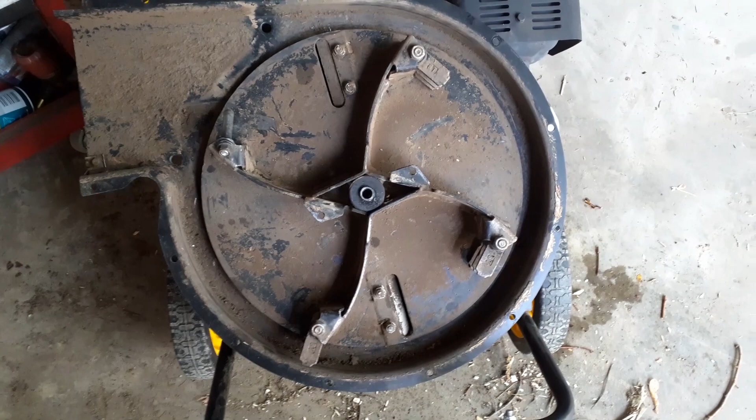How do you get this impeller, this big wheel, off a Champion chipper shredder? There was a little bit of a wreck.

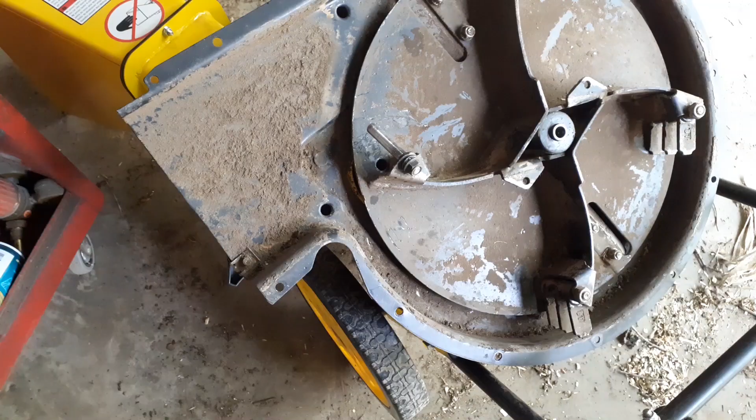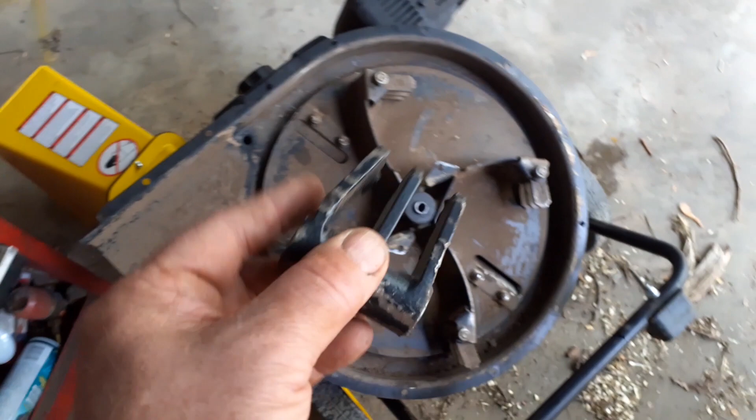There were some hand clippers or something metal in a pile of compost that was being shredded, and it went through. It ended up bending this ear and totally destroyed this part. It wasn't found, so this is a replacement. I put it in, and it also bent up this grill.

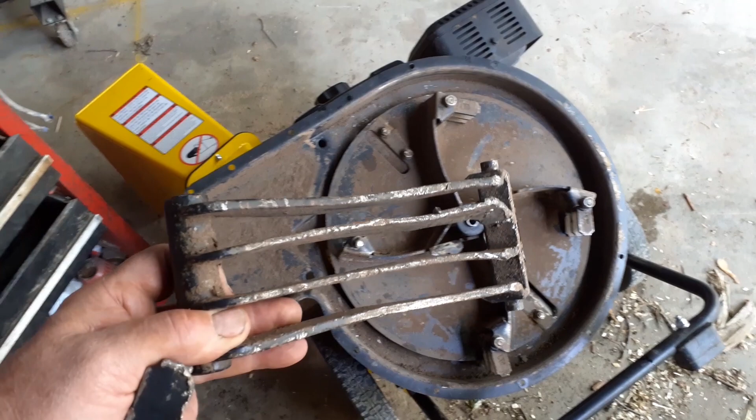It was worse than this, and I straightened it out the best I could. I bought a replacement flail to replace that, and I got a brand new pin. That's the new pin, and I attempted to straighten that, but it wasn't quite aligned. It wasn't good, and it immediately blew up.

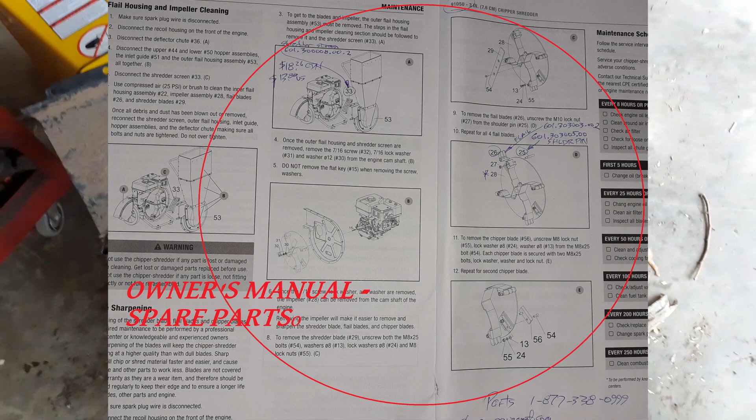So what I've done is I went to see if I could just order the wheel, and I would swap over the blades. They sell this entire thing as a unit, and it has the blades on it already, I'll show you that after. So I ordered the entire unit, and it just arrived today. Now I'm taking this off.

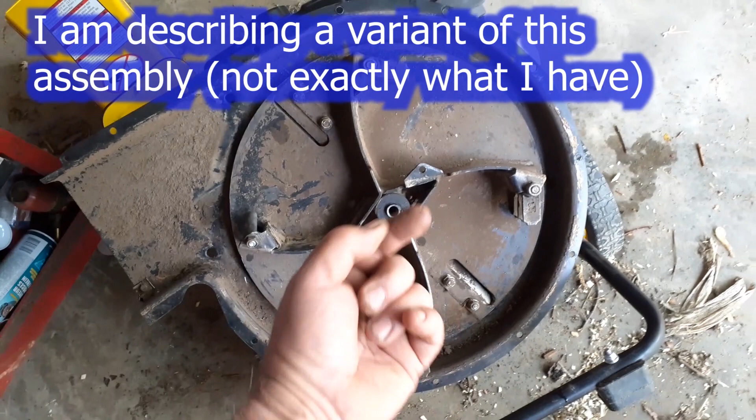If you look at videos on the internet about these chippers, they're all the exact same, probably made by the same place in China or wherever. This hole is threaded with a larger thread than the shaft on the inside that comes with it. It's an extended camshaft with a thread on it, and this has a bigger thread on it.

What you can do is get a special cut down bolt with an extended tip on it. Basically, you thread it into this larger hole, and the extended tip goes through into a hollow or end on the camshaft, and it will pop off. So you can use this puller bolt.

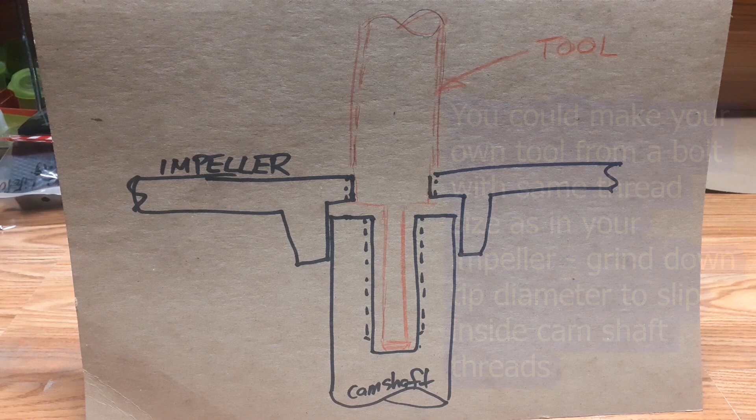This cartoon is to explain how the removal tool would work. The removal tool is in red - this is what you would use if your impeller, that's what this thing is, was tapped here. What this represents is the impeller. The impeller there is a slip fit here to the camshaft, and there's a big key also. This is not to scale - that's actually a longer engagement, but it just shows you, it's a cartoon.

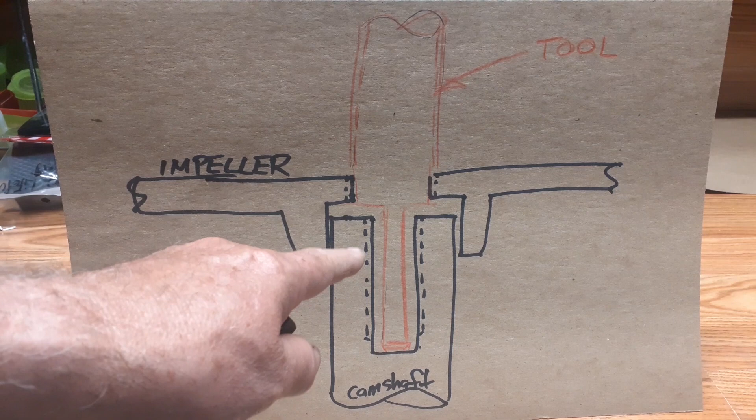The camshaft is tapped, and a bolt threads into that. The bolt sits then with washers on top of the impeller, the big wheel, and holds it down.

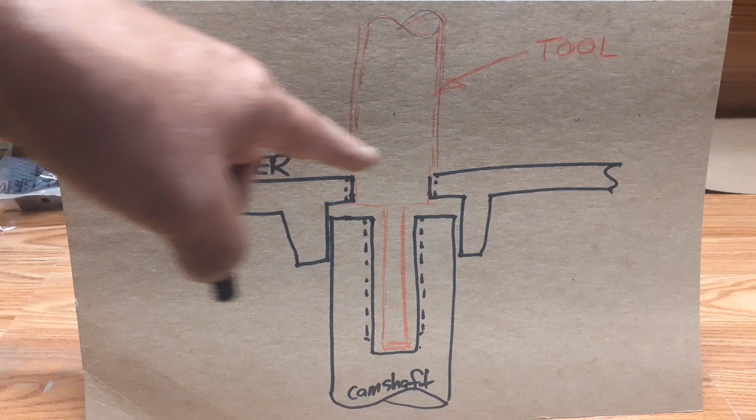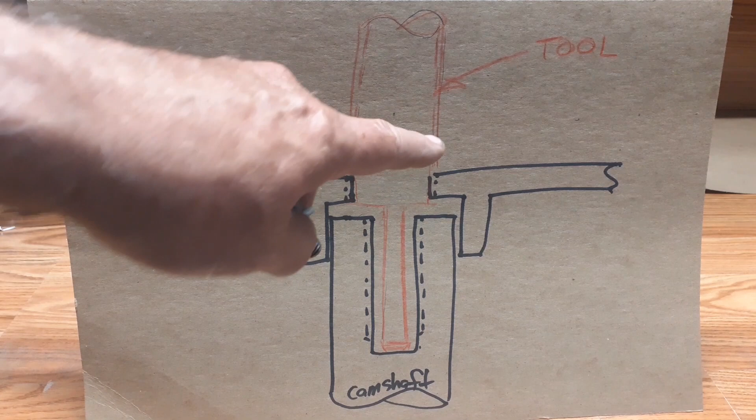On my impeller, I don't have any threads here - it's just straight through, so I have nothing to grip on. But on some impellers, this is threaded. This diameter here is much larger than that diameter, so the bolt can go through and doesn't even contact that.

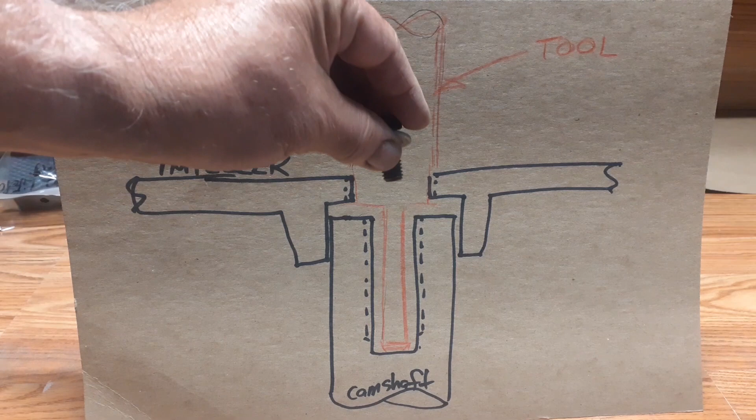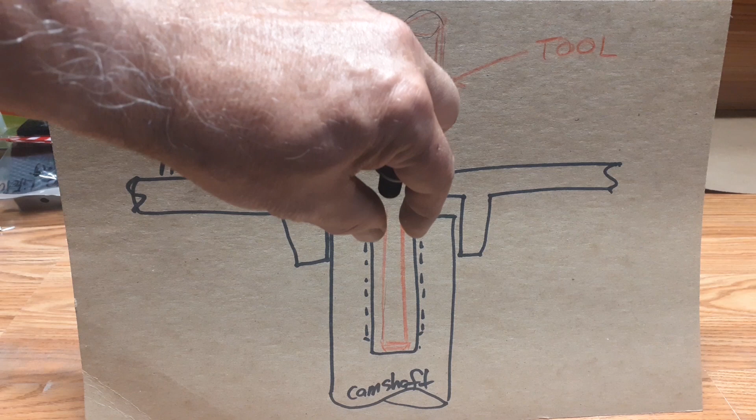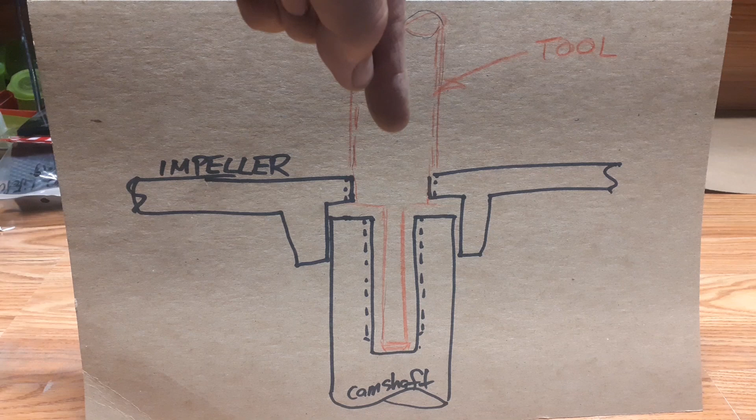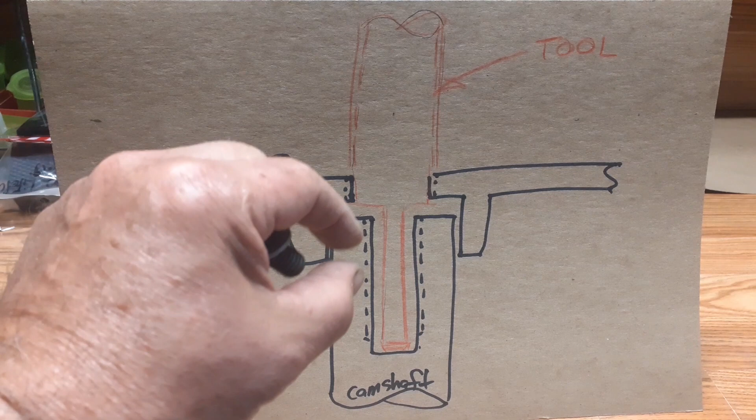But on your tool, what is in red, it has large threads up here, then it necks down and has just a thin thing like a punch, smaller than the thread, so it doesn't contact the threads, it just contacts the bottom of the hole. When you turn this bolt - it's got a bolt head on it, basically a modified bolt - it threads through here and runs itself down. As it runs down, it pushes on the camshaft, the bottom hole of the camshaft, and separates those two. As it works in that thread, pop, there it goes. So that's how that works.

This is not how it works for my machine, and I had to come up with another method. So this is a brief explanation of that.

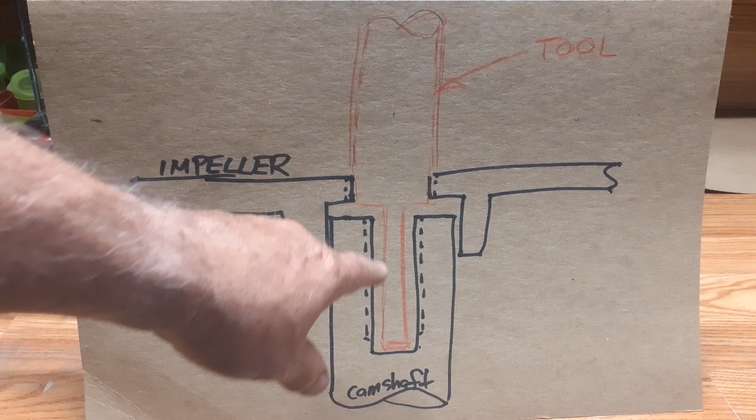If you were to make this up, you would buy a bolt, whatever the thread size is there, about 5 inches long, something like that, and do some measurements. Measure with a piece of wire the depth of the bore and so on, and grind down the bolt so it was a small diameter here that would fit into this M12 hole. This is M12 threads here, at least on mine.

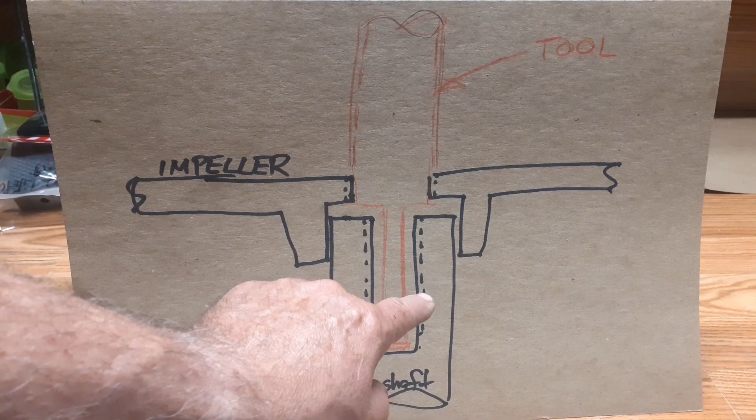Unfortunately, this one and this wheel, impeller wheel, and the one that I received, there's a smooth bore through here. There is nothing you can use, no feature on this you can use in there to push it off the camshaft. So I've tried some things.

I tried an engine hoist, suspending this impeller from chains, and then tap, tap, tap, tap. I put a bolt in there and tapped, tapped, tapped, bang, bang, bang, trying to knock the camshaft back. It does not move. There's a fairly tight fitting shaft and a keyway there.

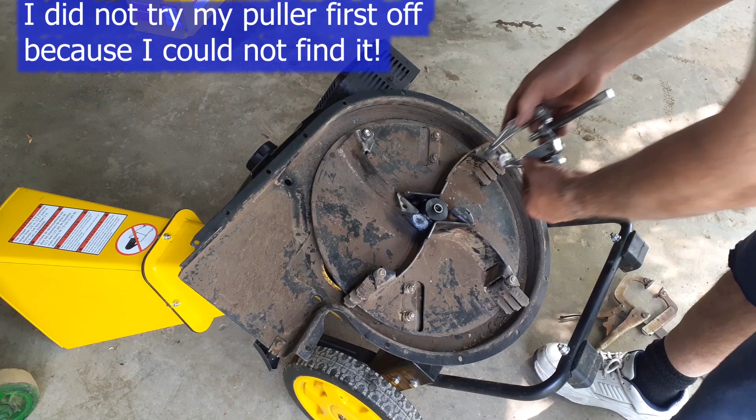So I thought I will use a puller. It's a 2-jaw puller. I thought, will these jaws grip at the angle and will they hold position here? What I will do is put in the bolt and thread it. I want to get maximum thread engagement, so I'm putting it all the way down, and I'm just leaving it 1/8 of an inch from seating.

Now I've already had this off, so it's not going to pop or anything like that. It's a straight shaft with the key, not tapered, so you probably won't get a pop. But you put it on like this. I drilled a little spot in the center of the bolt so that this will have something to center on - it's actually kind of ground away. And I put a dab of oil on it.

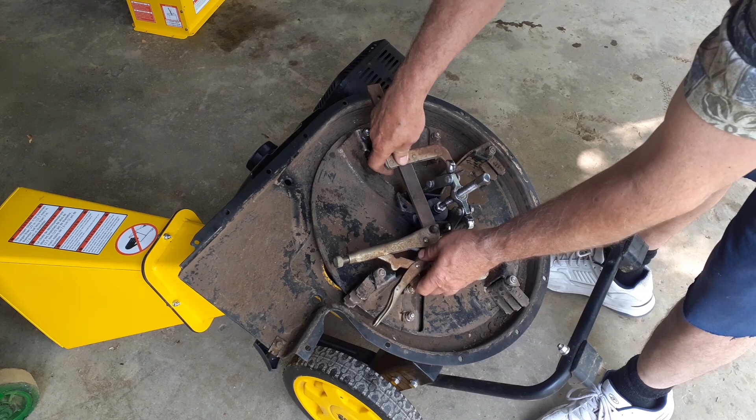And go like so. Now the thing I was afraid of, because of this angle to the jaws, was it going to pop out. So I put an additional clamp. It may not have been necessary, but I put this welding clamp on like that just to contain it. I don't want the jaws to pop out of the holes.

And it's a little bit crooked there, so we use a tiny hammer and periodically make sure that's in alignment. Okay, so far so good.

Okay, and I use the wrench like this, and now this is coming nice and easy, and I've used up that 1/8 inch of slack that I had, so now I'm backing it off. This is especially nice that I have this clamped in place, it's not flopping off when I undo this. But the bolt, I'm backing out the bolt. I'll back it out 1/4 inch, since it's coming easily now.

And now I'm going to tighten back against the screw that is screwed into the camshaft. But there's a gap between the head and the end of the shaft, or the face of the impeller. There, I just bottomed it out on the impeller, it drew the impeller up. So this is coming up.

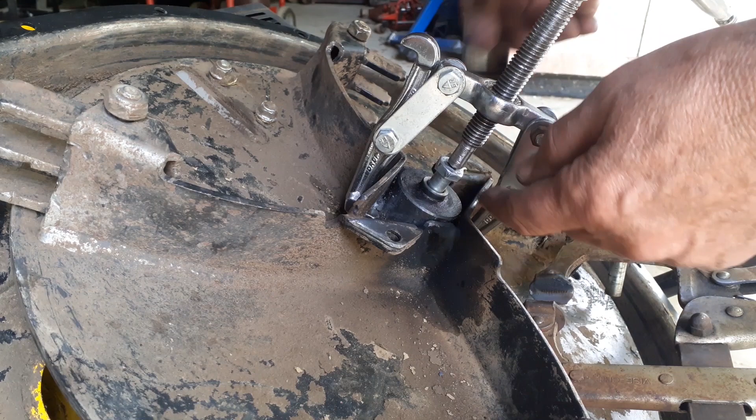Back off the pusher nut, and now I'm reaching down into the nut down here. I backed out the screw, so just a few threads are engaged. There's a 1/4 inch to take up there. Just watch that gap there, the impeller's coming up.

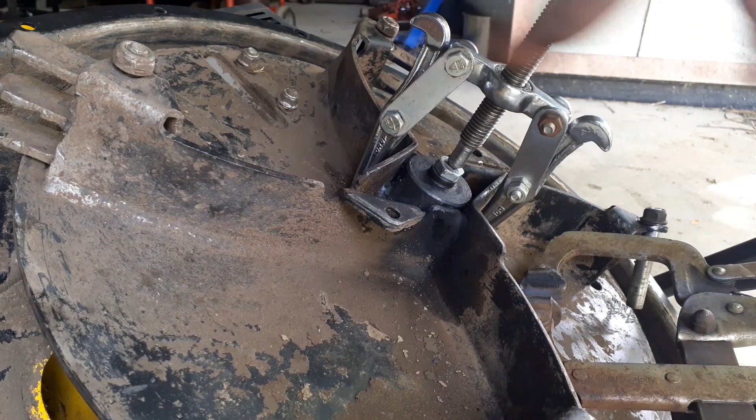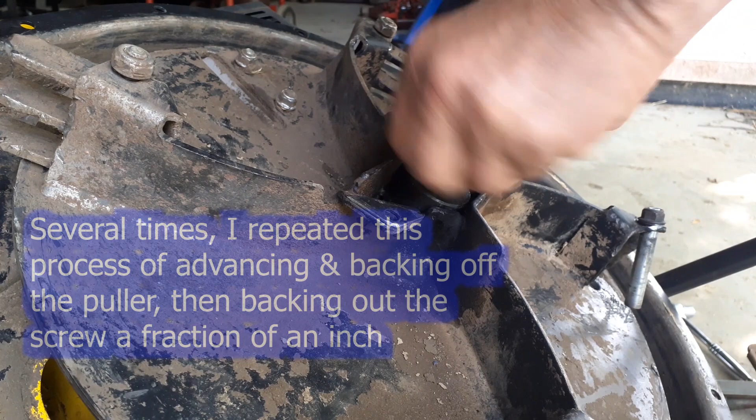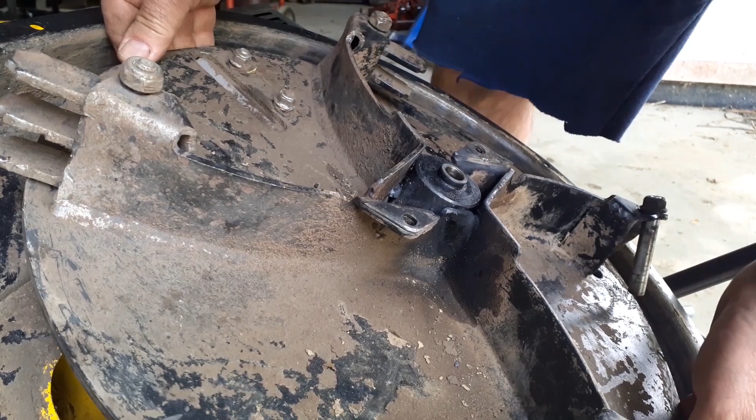Okay, at this point I should be able to pull this thing off, it just was a little sticky before. Okay. Well, you can see, keep wiggling. Don't let go.

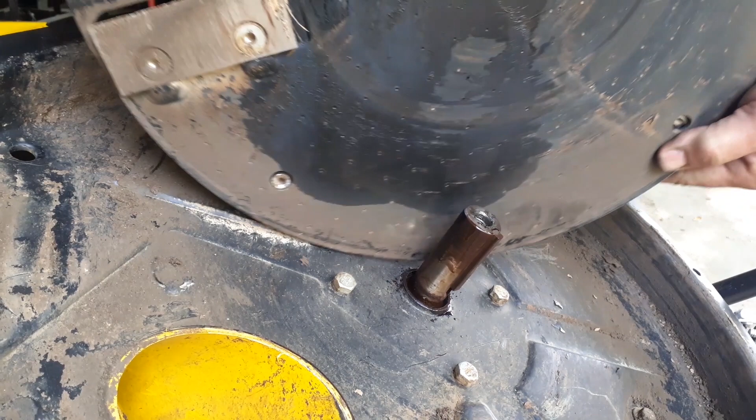There you go. So, see, it's a keyed bore. I did put penetrating oil in this last night. There's the key, don't lose that. It seems to be set in there, and that's the shaft.

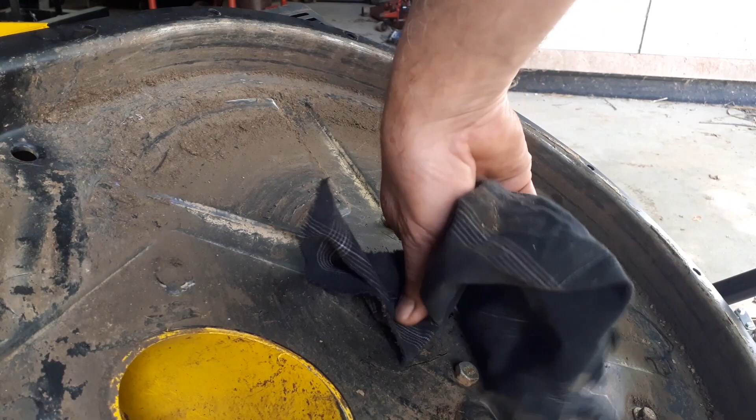Okay, I'll clean off the shaft. There's a lot of dirt around here, so I don't want to draw dirt onto that. I'm checking the key, nothing's twisted. I'm thinking one thing I worried about was from the impact, did I shear the key or twist it at all? But it pulled off nicely, and I'm pretty certain that didn't happen.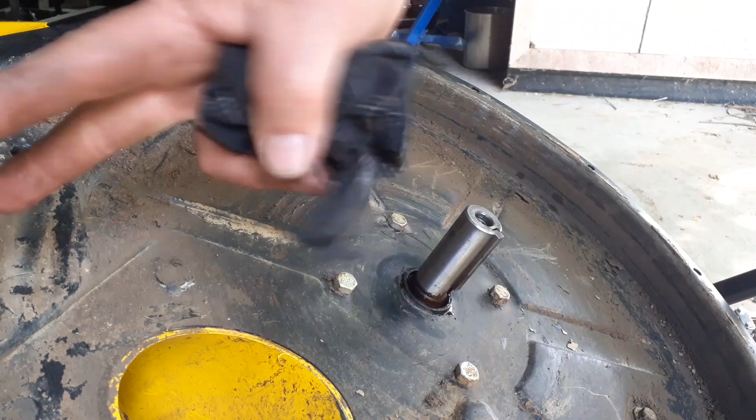When it did jam up, it was the flails hitting that screen here. This is where it jammed, and bits and pieces wedged between the impeller and the spout.

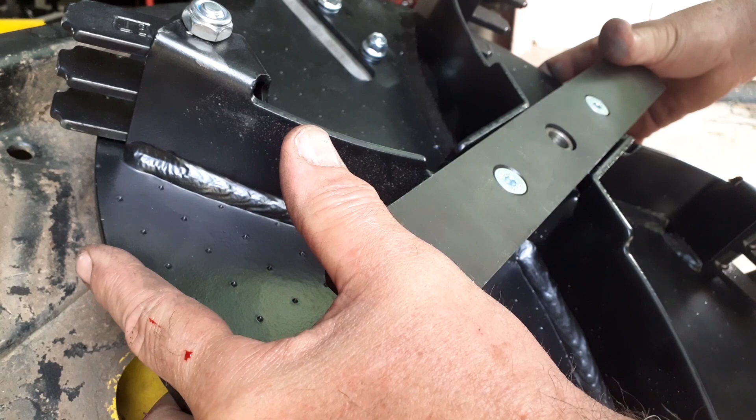And I'm cleaning the bushing or the bore in the mating part. Notice the key's at the bottom about 7 o'clock, and if I peer through this little hole I can actually see the keyway and line it up. So we'll get to, I'm tipping it on an angle, you see, not flat, but on an angle. I'm engaging, I'm making sure that key is timed correctly.

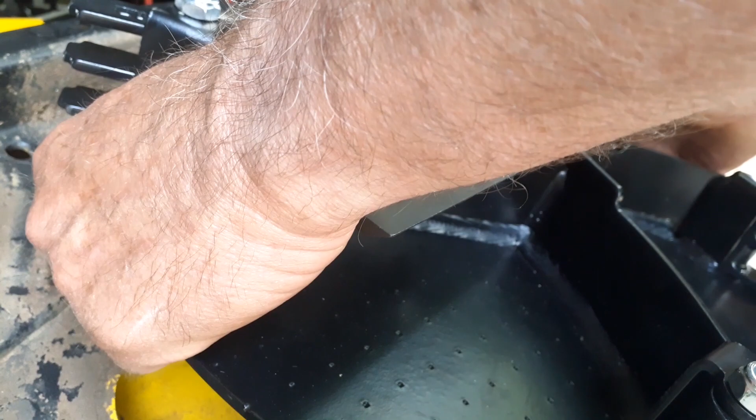There, I feel it. I'm trying to walk this, or let this settle on. And if I get it just perfect, it will drop on. You're not, oh, there we go. That is down, the screw will take it the rest of the way.

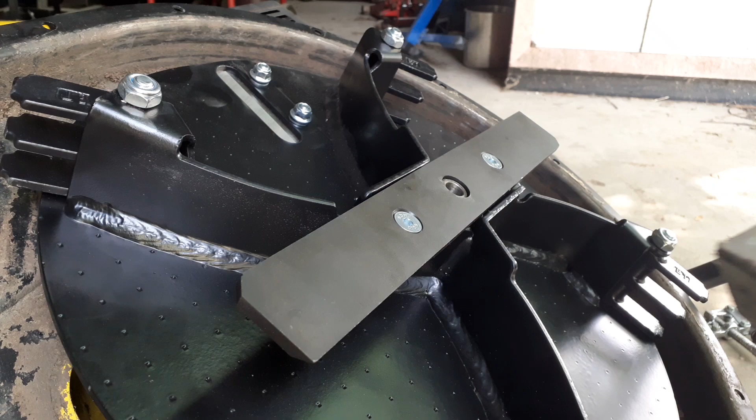We'll do this. The last thing is to bolt it down. There's a stepped washer, you can see that there. It locates into the blade and it retains the blade down, sucks it in. There's a flat washer and a lock washer.

And this metric bolt goes in here. I think it's an M12 thread on it. Not that it matters, but if you had to replace it, M12, and I'm not sure, but I think it's fine, I think it's 1 1/4 millimeter pitch.

So on the head of this, you know what I wanted to do was put a little bit of anti-seize on this. Not that it was tight when I took it off, but this thing's only about 2 months old, this whole thing. We had an ice storm and a lot of trees, the tree limbs came down. Anyhow, but in future, 10 years from now, maybe somebody will want to take this bolt out.

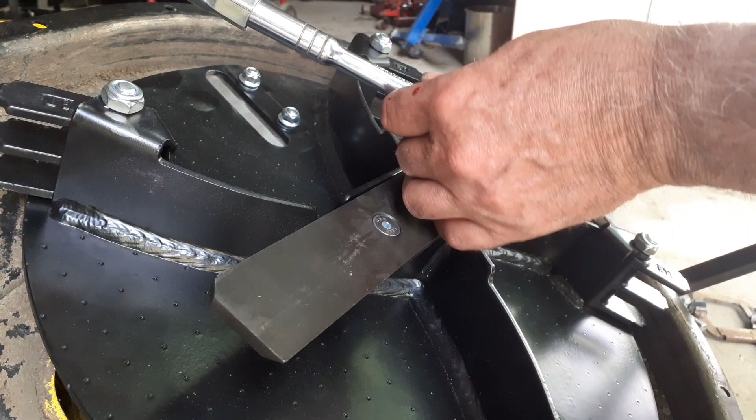So there we go. And this is a 17 millimeter wrench. Set it to tighten, we go like so. And for a little extra muscle, I slide a pipe on it. I'm not going to over torque it, but I just like to, that if you really, when you remove the bolt and so on, one thing you can do is put a 2x4 in, stand it like that.

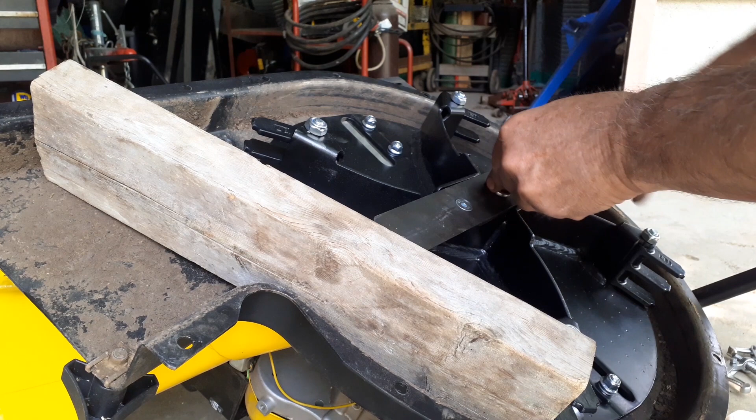We're compressing the lock washer. Now we're getting to torque. And I say that's sufficient. And we are installed.

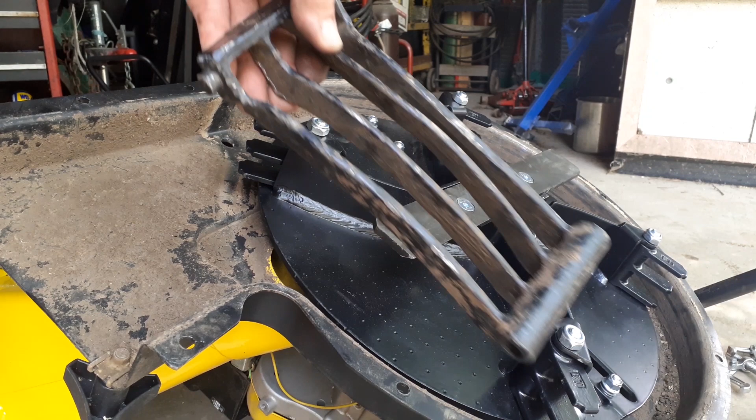I have not received, via the mail, the new shredder grate. The shredder grate, this one I could bend, and I don't want to try and bend it again. It has to align with these. These have to poke through, and it's got a little pilot hole there, and then a pin goes through here, and then you put the shroud on.

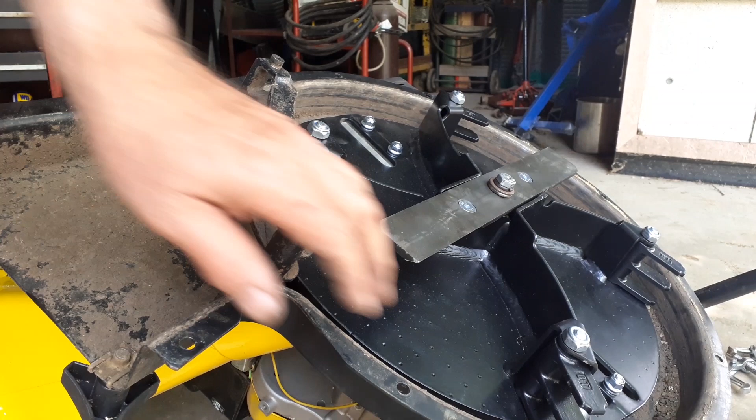But I will leave the rest of the assembly as a professor I know used to say, an exercise for the student. And if you got it apart, you can put it back together. There are a number of screws, and basically you need a 10 millimeter wrench and maybe a 12 at some point. So I hope that helps you if you have to remove an impeller and it is not the threaded style of impeller, and you have to use a puller. So just wanted to show you there is another way.